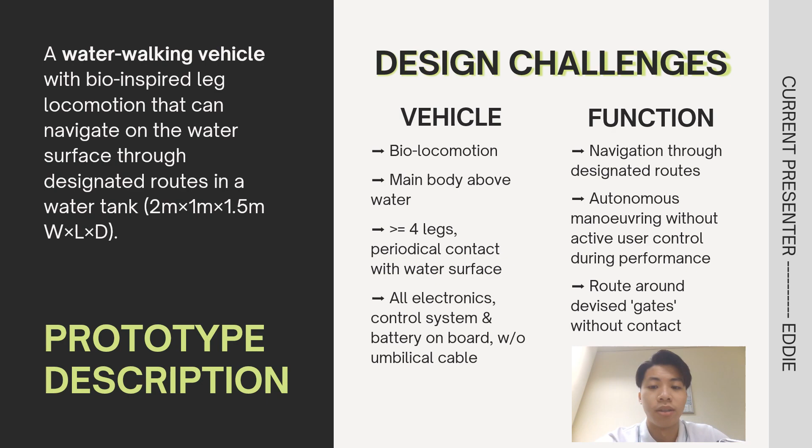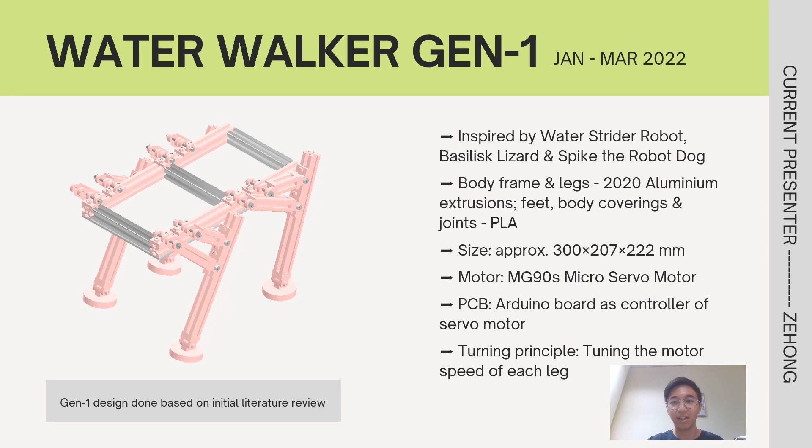MG90S microservo motor is used as the driving motor, and Arduino Uno board is the only PCB as controller of servo motor. Lastly, the turning principle was to tune the motor speed of each leg.

This slide shows the Water Walker Gen 2 that we did for September to December 2022. On the left, you can see the CAD model of our Water Walker, and on the right, it is the actual model of our Water Walker that we tested on a pool.

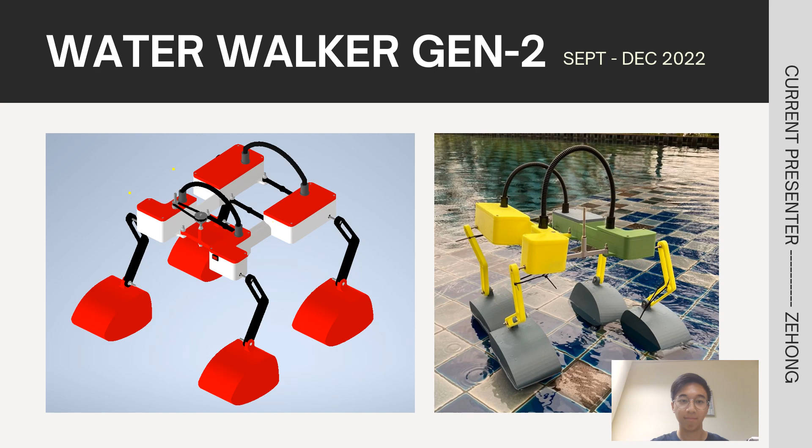Water Walker has been segregated into four main subsystems, which is body, locomotions, electrical hardware, and control systems. Eddie will be in charge of the Water Walker body, which includes body, legs, and feet, as well as other miscellaneous items like fasteners and bearings. And the locomotions was supposed to be handled by our previous groupmate, Jaydenn Lam, but due to some unforeseen circumstances, he will be dropping out and I will take over his task. Therefore, I will oversee electrical hardware along with locomotions.

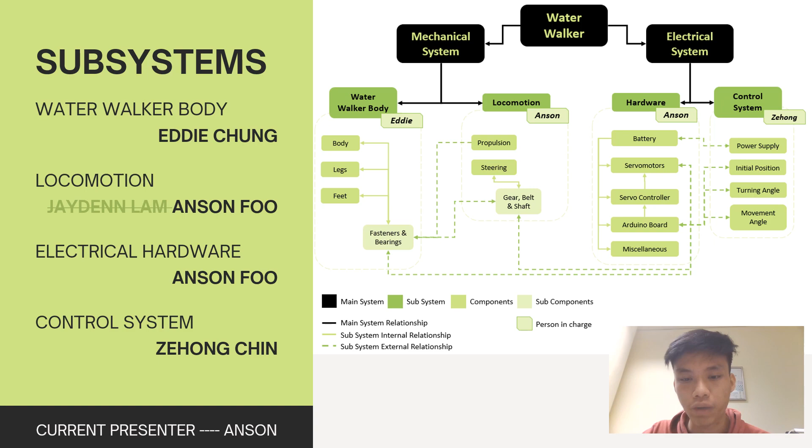Electrical hardware includes battery, servo motors, and controllers. And finally, Zehong will be assigned to control systems that perform coding of power supply, initial positions, turning, and movement angle.

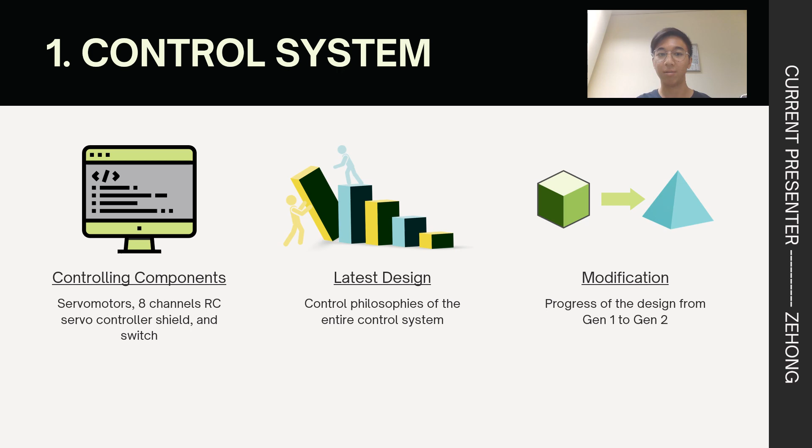In this section, we will be showing the controlling component used in the system, our latest control system design, and the modifications from the Gen 1 Water Walker. Arduino Uno R3 is the main microcontroller used for the entire subsystem. It acts as the brain of controlling the movement of the Water Walker.

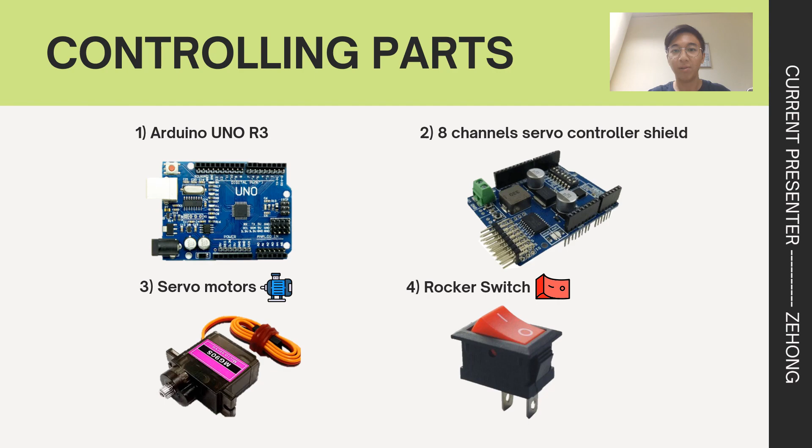Also, an 8-channel servo controller shield is newly introduced to supply more voltage to power all the servo motors. It is designed to control 8 independent servo motors concurrently in a single board with a built-in 5V 5A switching regulator. Then, servo motors model MG90S is selected to be the driving motors of the Water Walker, and lastly, a 2-pin rocker switch is used as the on-off switch of the subsystem.

In our latest control system design, the Arduino Uno board contains all the program inputs to the servo shield, servo motors, and rocker switch. Servo motors and switch will not directly connect to the Arduino board. Instead, the servo shield is attached to the Arduino Uno board to receive the input from Arduino. They are driven by 2 different power sources, which will be explained later in the electrical subsystem by Anson.

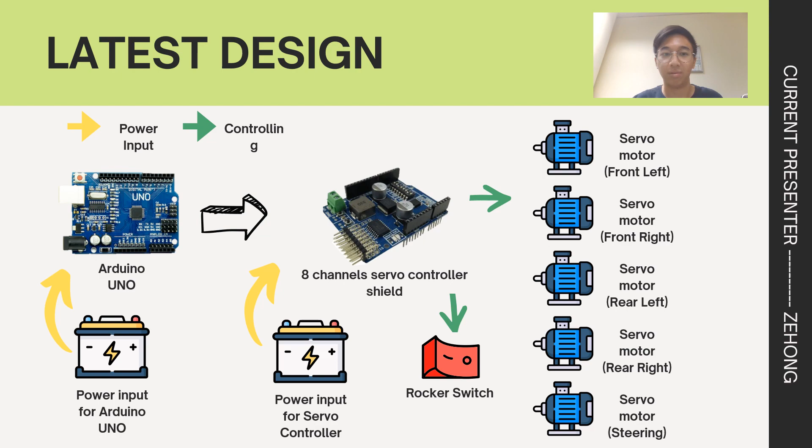Then, the servo shield controls the 5 servo motors and rocker switch. The servo motors are attached to channel 1 to 5 of the servo shield according to the order as shown. For motor movement, all motors have the same initial position at step 4000, approximately 90 degrees. Left and right half of the legs cause the motors to have different movement positions. Left motors are moved from step 3000 to 8000, while right motors are moved from step 5000 to 0. The movements are completed in 1 second.

The principle of the motors such that the water walker can move smoothly is that one pair of diagonal legs will move while the other pair will not move. For example, front left and rear right motors will move first, followed by front right and rear left motors.

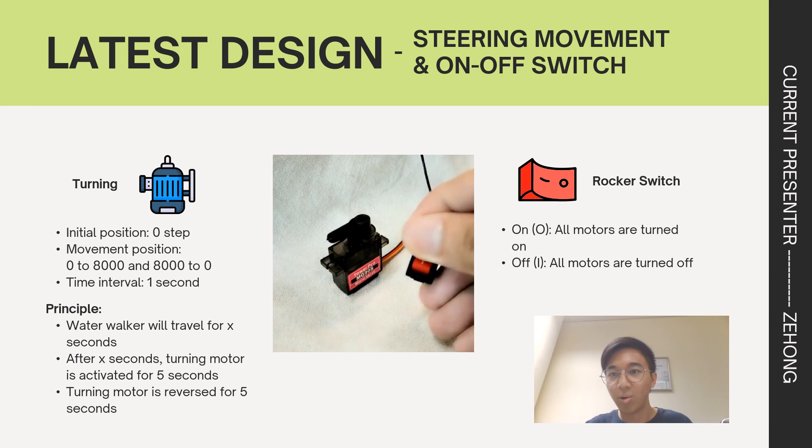For turning movement, the turning motor has an initial position of step 0. To fully utilize the motor on the timing belt, it moves from step 0 to 8000, or reversely, in 1 second. The control principle is that the water walker will travel for X seconds before reaching the gate.

After X seconds, the turning motor is activated for 5 seconds and then reversed for 5 seconds to travel back on a straight path. This principle applies to the water walker every time it needs to turn. Besides, a switch is added to turn the motors on or to shut them off.

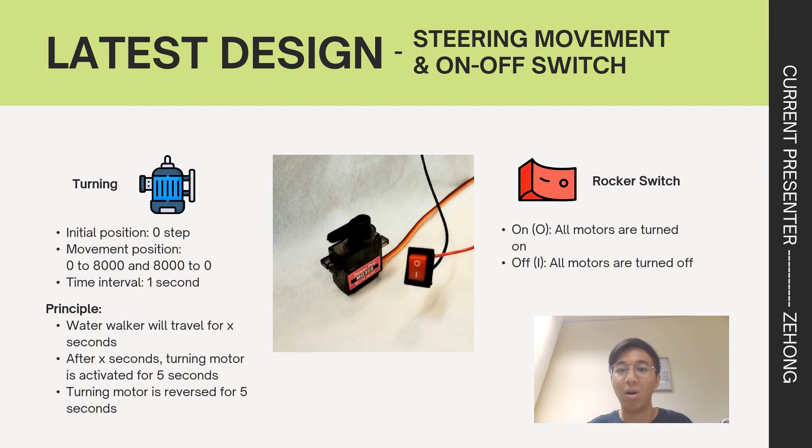To conclude the control subsystem, the Gen 2 version has 5 motors that are powered by a servo shield. The new 5th servo motor is in charge of the turning, which is different from the Gen 1 steering mechanism. An on-off switch is also added to control the flow of power to the servo motors.

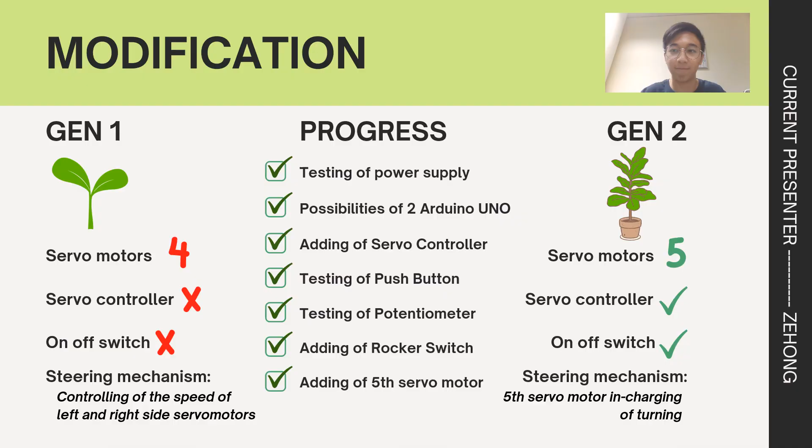In the progress of achieving the Gen 2 system, we have looked into the possibilities of using two Arduino Unos as inputs, a push button and potentiometer as switch, and tested the power supply. Therefore, all these components we need to review and modify based on their challenge phase.

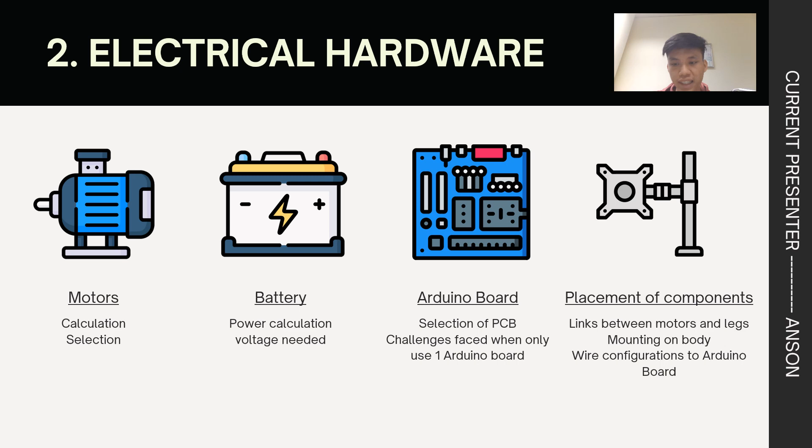This system includes a battery to power up, motors to move or steer the legs, and a programmable circuit board to act as the brain of the system. All of these components selected will be discussed later regarding the design and justifications. Finally, the components will then be assembled to another subsystem and perform a final test run.

Firstly, the motors will be focusing on the theoretical calculations and final selections based on the mass of the legs of the water walker. Buoyancy force that helps to lift up the water walker will be discussed in later parts by Eddie, while the propulsion force to move the water walker forward is determined by the mass of the legs. Starting from those parameters, the minimum slap impulse generated by the legs is calculated by multiplying the weight of the legs with the period the motor rotates.

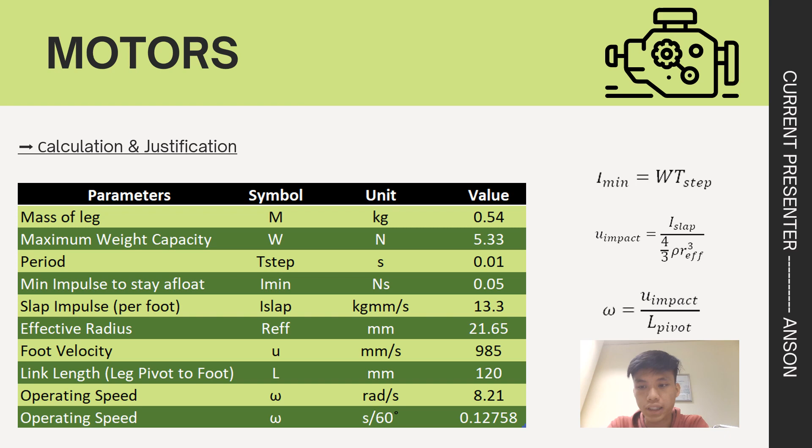Then, the foot velocity is determined using the formula as shown on the right. Finally, the desired operating speed is calculated by dividing the impact velocity by the link length provided by the body and legs subsystem.

Therefore, with the final required operating speed of 0.127 seconds per 60 degrees, I have chosen the MG90S micro servo as our thrust motor, with an operating speed of 0.08 seconds per 60 degrees. It has a stall torque of 2.2 kilogram centimeters to overcome the torque needed.

And for the battery, initially only one battery supplied 4.8 volts to all 4 walking motors. However, we met the problem of insufficient power to run the motors. This challenge will be discussed later in the next slides.

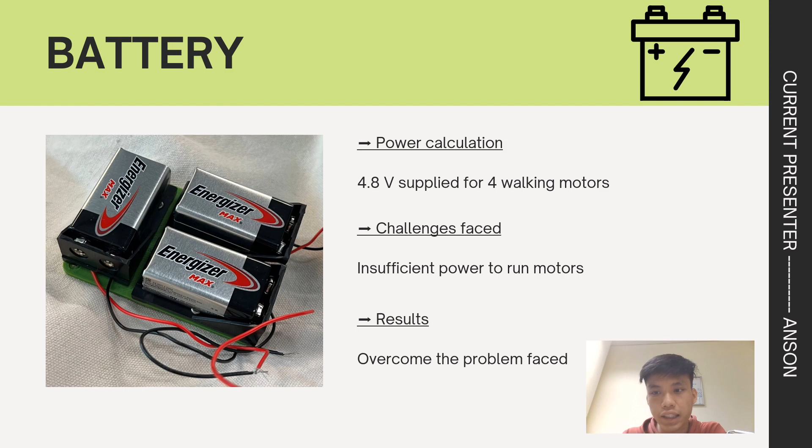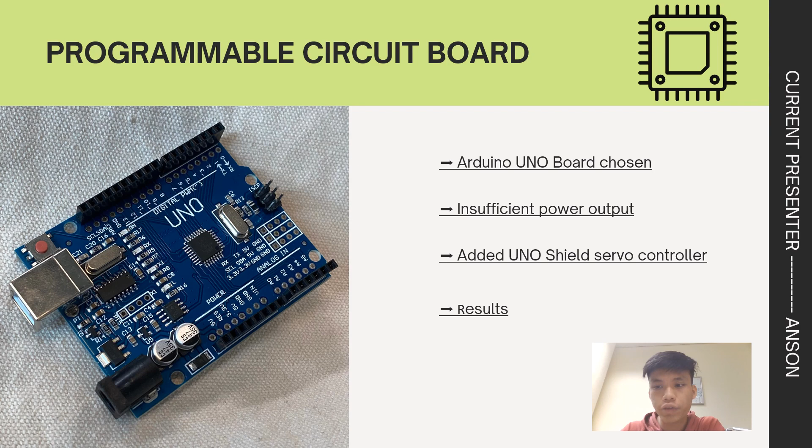And for the Programmable Circuit Board, in short PCB, we have chosen the Arduino Uno board as the brain of the servo motor. However, this PCB only supplies a maximum of 5 volts, which is only sufficient to power one single motor. Therefore, for this semester, a servo controller Uno shield has been added to resolve this issue, which will be discussed later. And now, the next video will show you the challenge faced previously.

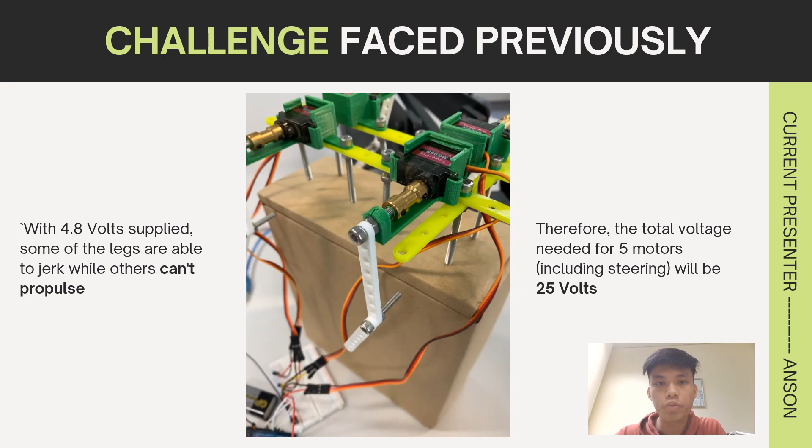With a 4.8 volt supply, the legs cannot move properly and cause some jerky motions. Therefore, if every motor needs to operate at full capacity, all 5 motors, including the steering motor, will require 25 volts to run.

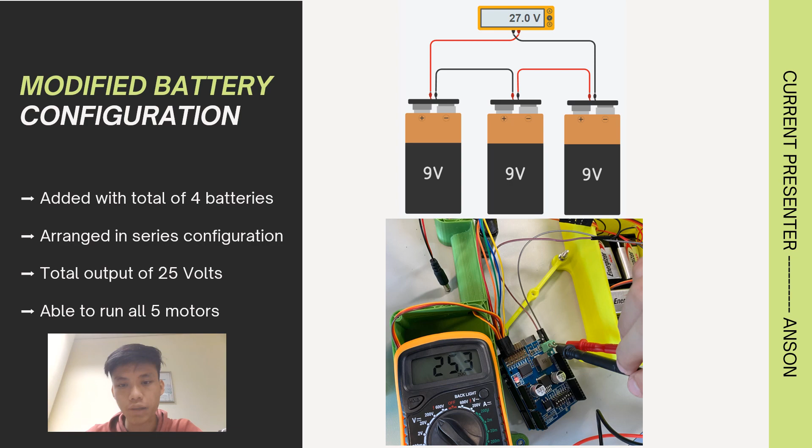With that in mind, total batteries were increased to 4, separating one battery to power the Arduino board, while the rest power a servo controller that directly supplies 25 volts to all 5 motors. By connecting three 9V batteries in series, it is able to supply up to 27 volts of power.

And for the modification of the PCB, the function of the servo controller is to provide up to 25 volts to the motors and power up to 8 motors. This controller is compatible with the Arduino board, acting as a power boost on top of it to power the rest of the motors.

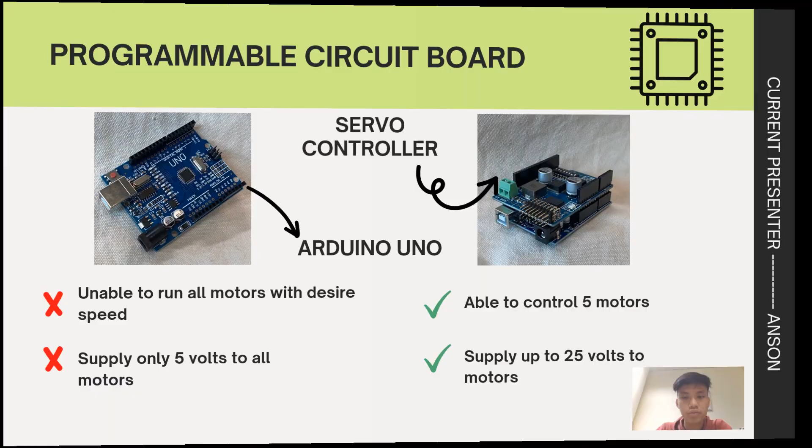The figure above shows the connection of the Arduino board and circuit. The servo controller is mounted on top of the Arduino board by slotting the channels of the servo controller onto the board. Then, the codes and power supply provided to the motors are linked at the servo controller at the side.

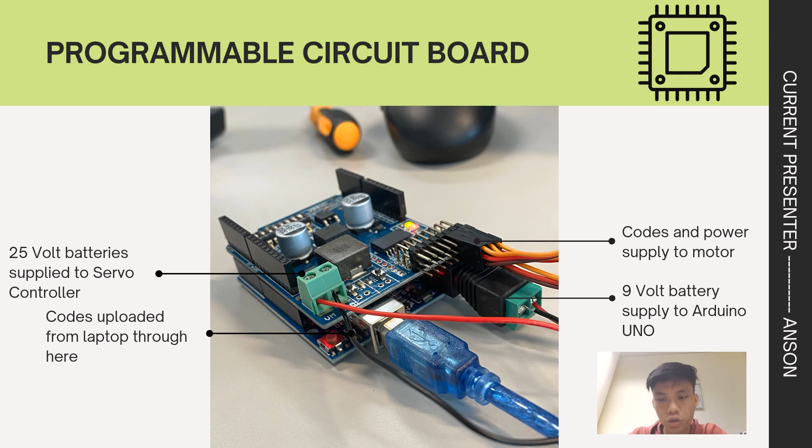A power supply of 25 volts is connected to the servo controller, while the 9-volt battery supplies the Arduino board. The blue cable that connects to the Arduino board is used for uploading the codes of the motors via laptop.

The battery pack is secured at the rear right side of the body, while the battery that powers the Arduino board is located at the front left, to balance the weight distribution so that the center of gravity will not focus on the rear side.

Now for the next video, I will be showing the test run of a single leg, to check that the motor has enough power and torque to run the legs and foot.

In this video, the power supply of 5 volts is sufficient for the motor to produce the required torque and speed. The leg and foot are able to move accordingly while connected to the motor.

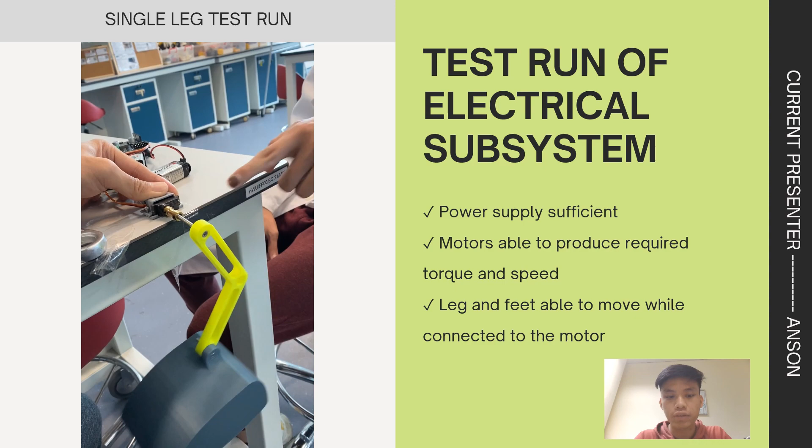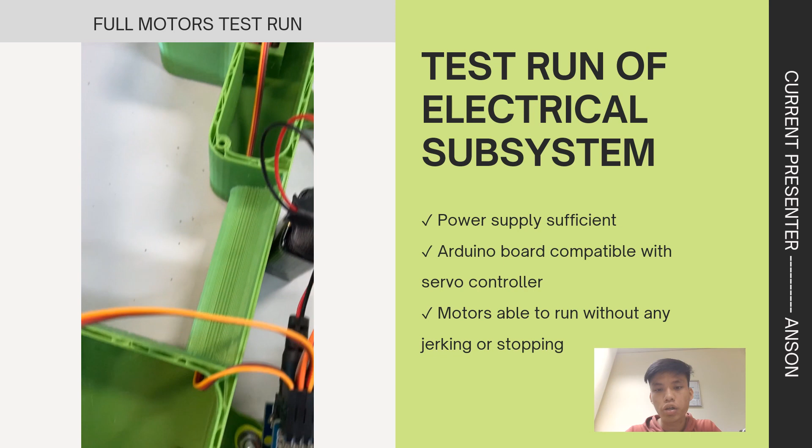Lastly, the final video here shows the full test run of the electrical subsystem. By connecting all of these components, the Arduino that was coded by Zhehong is able to run all 5 motors together with the desired speed. Modifying the power supplies and adding a servo controller solved the issues of motor jerking. To conclude, it is a success when these configurations work and all motors are able to rotate according to our requirements.

And now for the locomotion design of the water walker. These parts were left with some work that needs to be refined, and I will be in charge starting next semester. Therefore, the following slides may not show the full progress of the locomotion work. This design will mainly discuss the propulsion systems and steering mechanism.

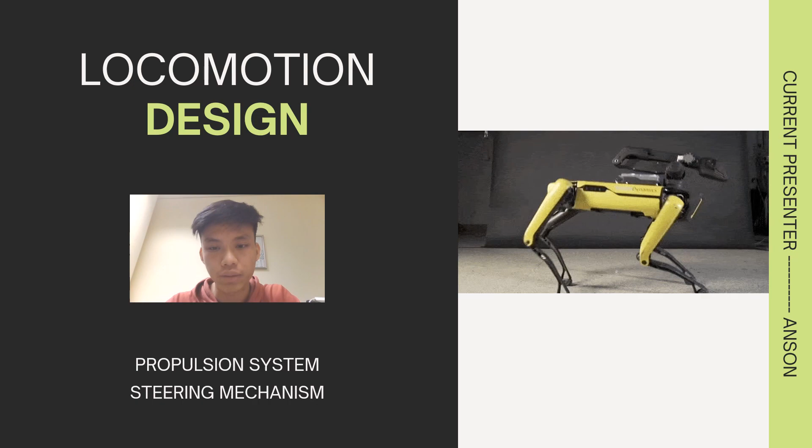The propulsion of the water walker uses a combination of skiing and the movement of a robotic dog. Since the water walker will be locomoted at the water surface, the legs will move in a trot as shown in the figure on the right, while skiing the water backwards in order to move forward. This prevents the legs from touching the water the entire time by leaving other legs free.

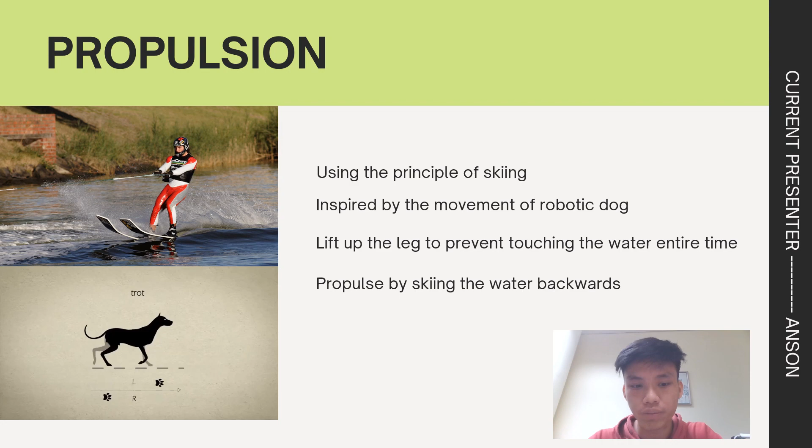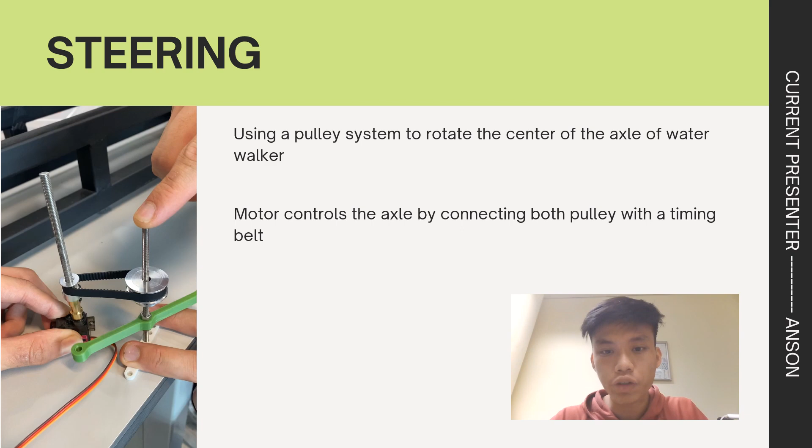For the next video, I will be showing you the steering mechanism. This steering mechanism is controlled by a timing belt pulley that is pulled by a servo motor, as shown in the video. This motor controls the axle at the middle of the water walker by connecting both pulleys with the timing belt. The next video will show you how the axle rotates and steers the water walker.

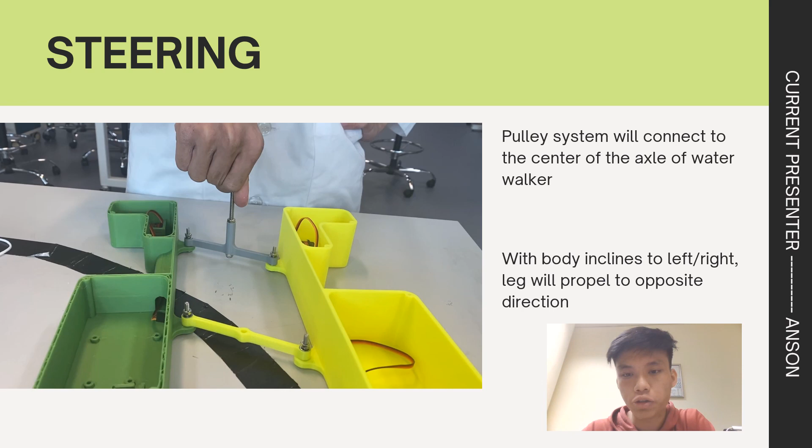By rotating the axle at the middle point, the water walker will propel in the direction required based on the legs' movement. For example, if the body inclines to the left, the legs will propel to the right side. However, this steering mechanism could not be completed this semester due to the absence of a previous groupmate. It will be further developed in our future plan.

The design of our water walker body is highly dependent on the other subsystems. Therefore, the following design sequence was employed: the fasteners and bearings were selected first based on the requirements of other subsystems, followed by the body containing all the components, 4 biolocomotive legs, and 4 buoyant feet, sized based on the weight and dimension of the water walker.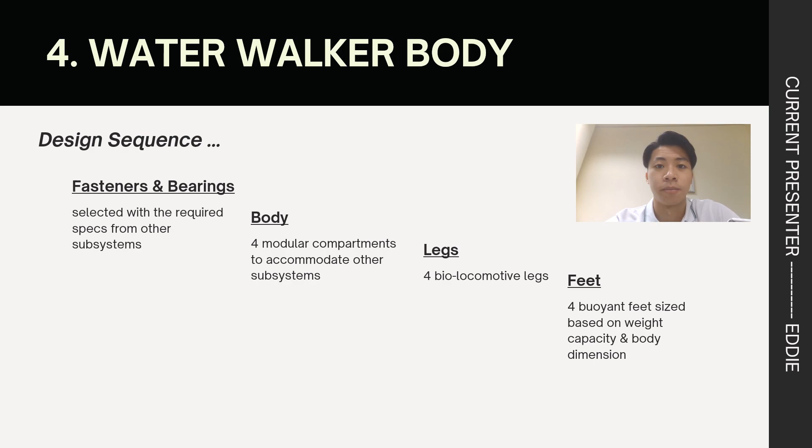In the previous semester, the progress of this subsystem was up until the development of links and joints. The leg links were decided to be made with 2020 aluminum extrusions supported by customized PLA joints. Some scaled-down modular test components were also developed in order to test the functionality of the design without wasting materials.

Finally, the fasteners, fittings, and bearing sizes were set, but a decision was later made to switch all the body components into PLA printed parts for weight reduction.

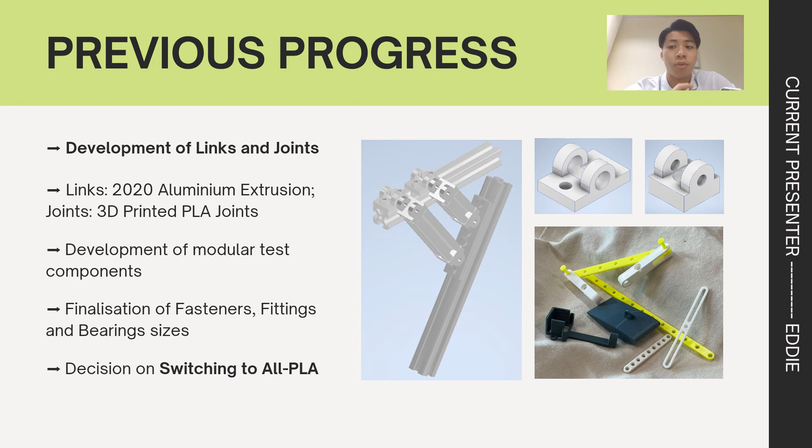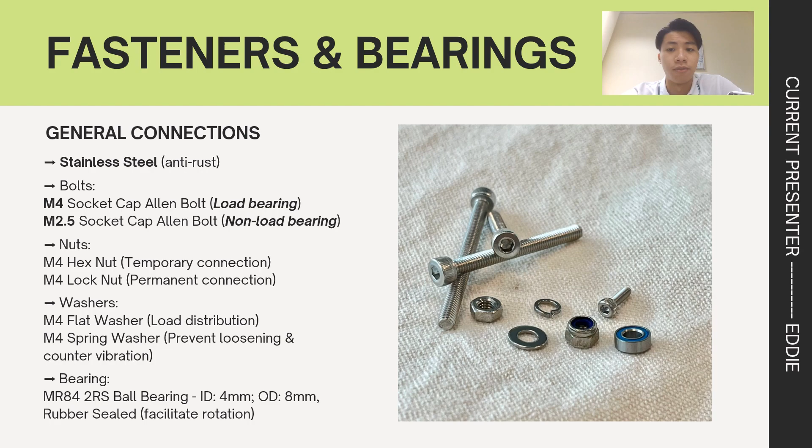The fasteners used in this project are all stainless steel unless stated otherwise, because it does not rust. The list of fasteners and bearings used can be seen on the left side of the screen. Generally, M4 was used for load-bearing parts because it has adequate strength while having considerably low mass, while M2.5 was selected for non-load-bearing parts as it is the smallest size available.

The usage of fasteners of the same size across a design had proven to be convenient. However, some standard parts in the water walker, such as the Arduino board, the servo motors, and the steering and propulsion system, would require different sizes of fasteners, which is unavoidable and had to be designed accordingly.

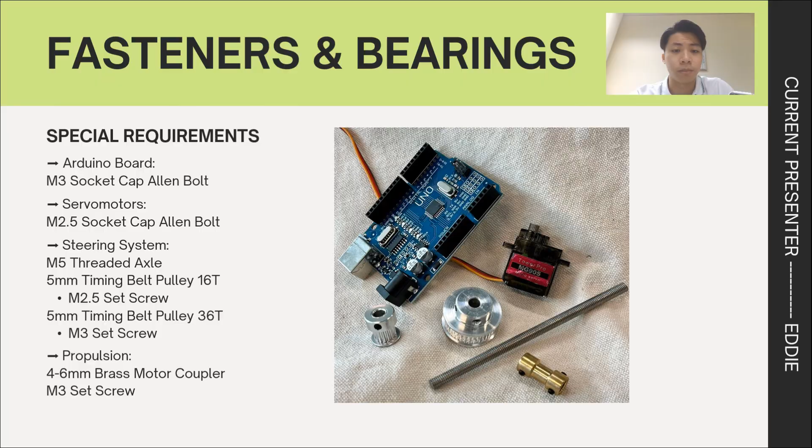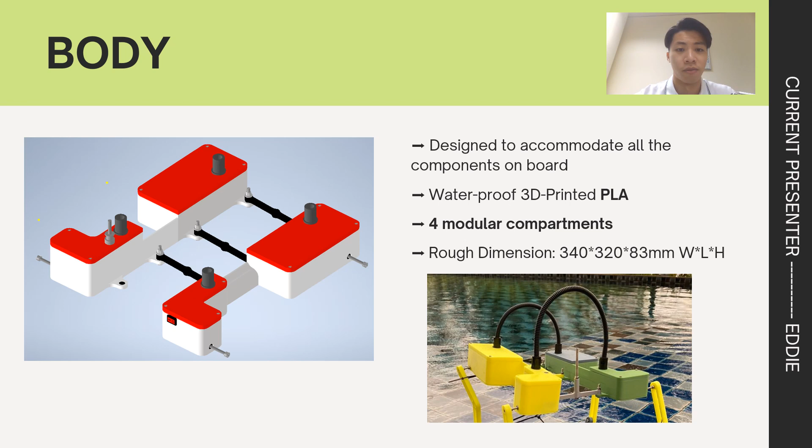With all the fasteners and bearing size determined, the body could now be designed. It has to accommodate and waterproof all of the components on board. Therefore, PLA was our choice of material. The body was split into 4 modular compartments for ease of manufacturing, weight distribution, and also to serve the propulsion and steering system.

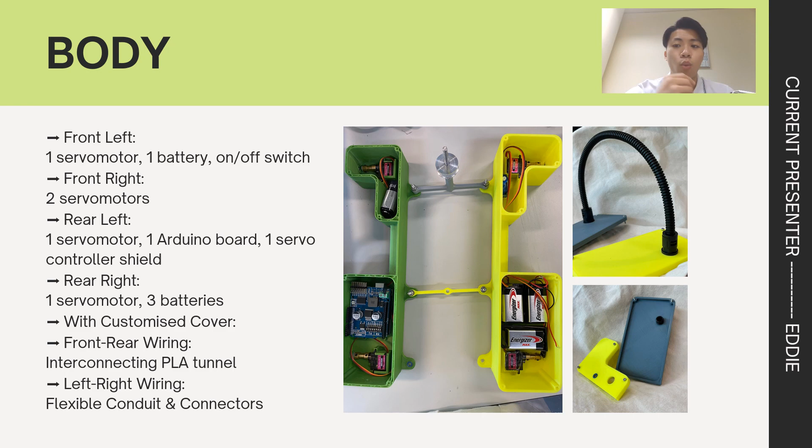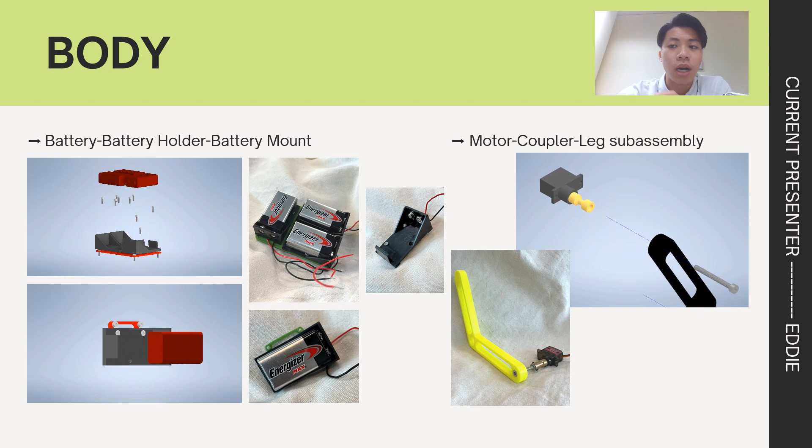The compartment covers were also custom developed with flexible conduit and tunnels to enable waterproof wiring connections between the body. The servo motors were mounted in the compartments with custom designed motor mounts. The assembly can be seen in the middle of your screen. The 4 batteries used were split into 3 and 1 with customized battery mounts supporting the battery holder before securing into the body. The motor coupler axle leg sub-assembly is assembled as demonstrated.

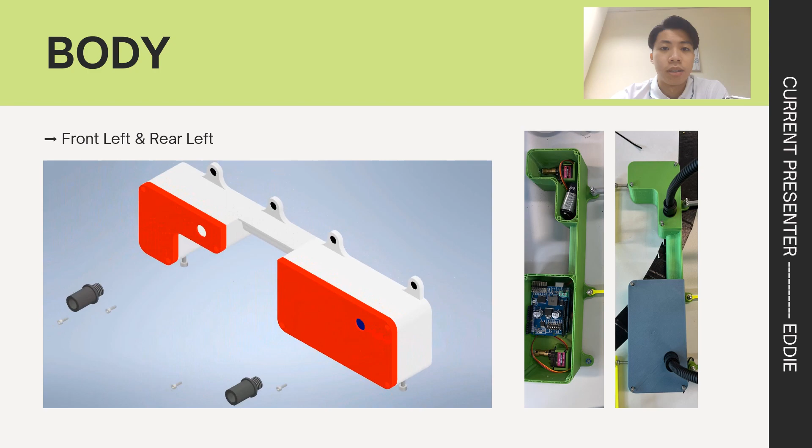With all the customized components listed, it is now time to look at the components assembly, starting with the front left and rear left, and the front right and rear right.

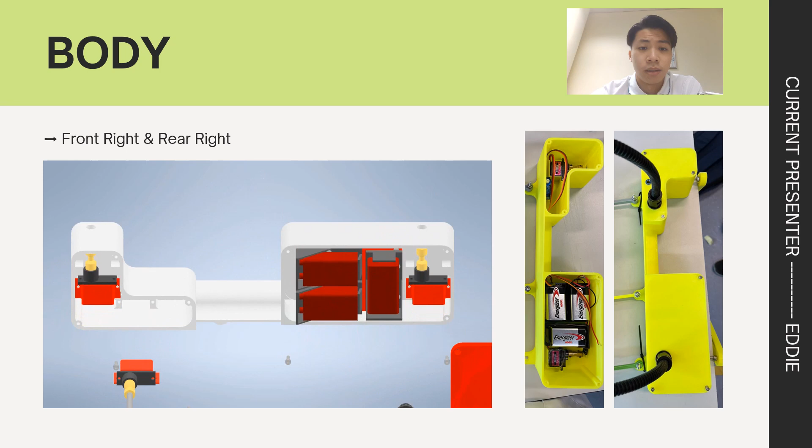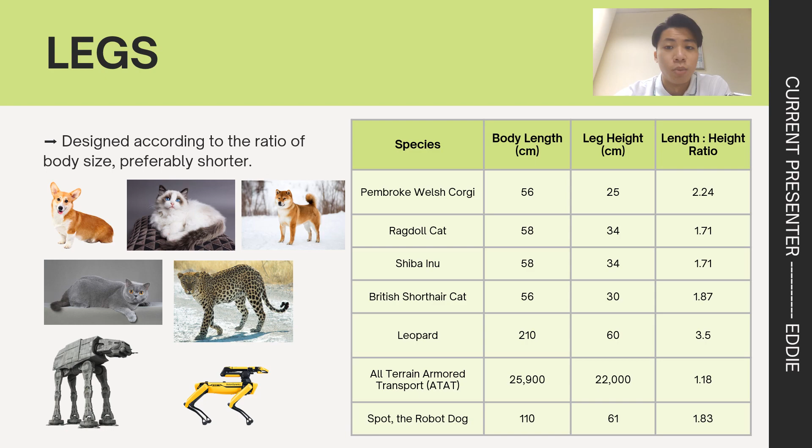The legs are arguably the most prominent feature of the water walker, as it stands out among other aquatic vehicles. Our water walker legs were designed according to the body length and height ratio from a variety of terrestrial mammals and robots, but it is preferred to be shorter for stability. Following that point, the dimensions selected for our leg are 175 mm in height and 10 mm in thickness.

It is made out of 2 120 mm links at 135 degrees to mimic the leg motion of the references in the previous slides, distribute the stress from the mounting point, and also add cookie points for aesthetics. The length-height ratio is 1.68, which resembles most of the references previously.

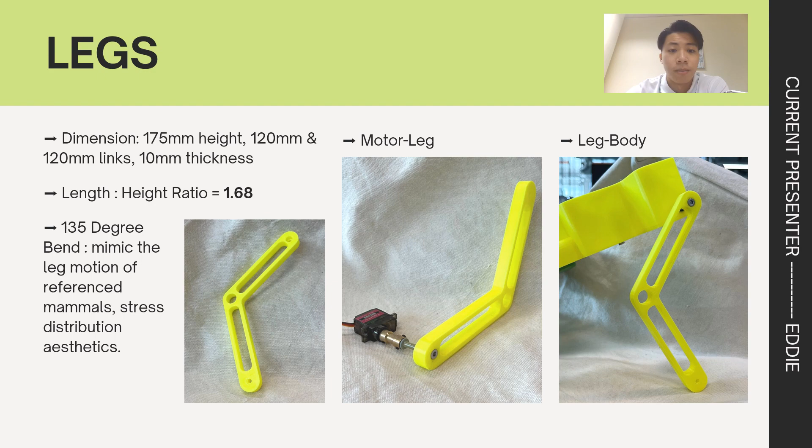With the leg design printed, an experimental compression test was done, and it could withstand at least 40 newtons of direct compressive load. FEA simulations were also performed with an approximated model of 0.8 mm wall thickness with no infill microstructure assumed. Based on the ultimate tensile strength of PLA between 30 to 35 megapascal, the water walker's leg is theoretically able to sustain 67 to 79 newtons of direct compressive load, which is more than sufficient based on the water walker's weight, which will be elaborated in the following sections.

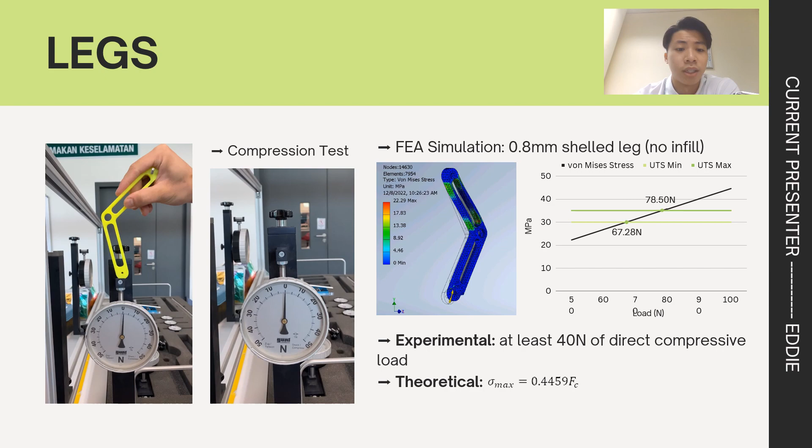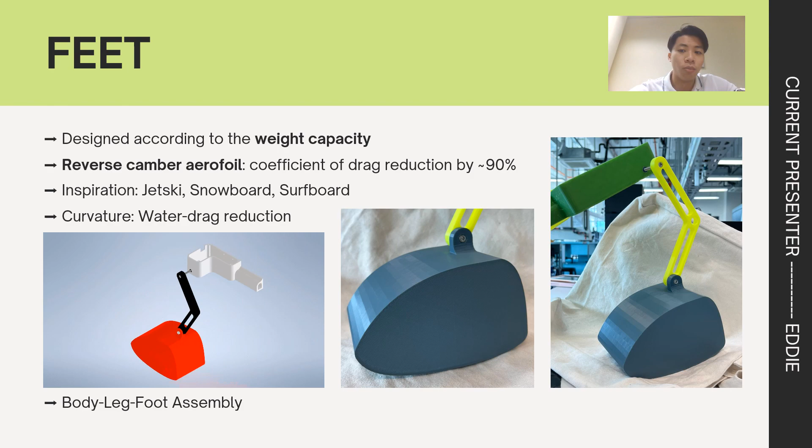Last but not least, the feet. It is a reverse camber aerofoil shape to reduce the coefficient of drag by 90% compared to a flat incident surface. Inspiration was taken from jet ski, snowboard, and surfboards with similar front to rear curvature for drag reduction.

The feet has to be designed for maximum buoyancy so that the water walker floats all the time. The design is constrained by the weight capacity and the width of the water walker. It was also assumed that point load was applied perpendicularly onto the feet, and at least 2 alternative feet are in contact with the water simultaneously during locomotion.

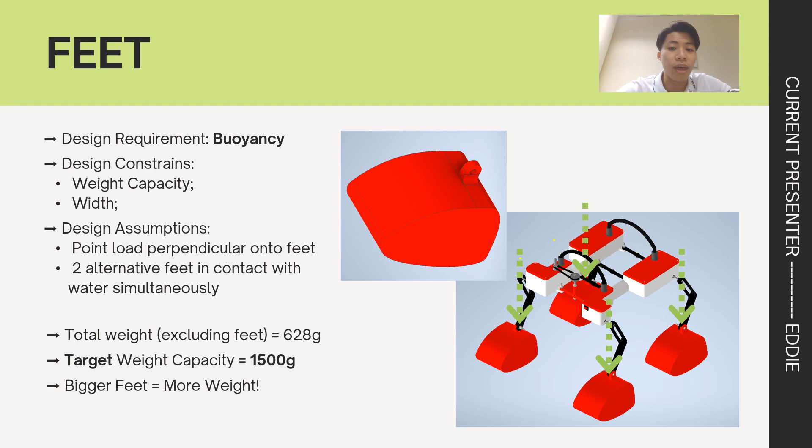Following that, the total weight of the body, legs, and components are 628 grams. The targeted weight capacity is therefore selected to be at 1,500 grams, with extra allowance being for the feet's weight and additional components if required.

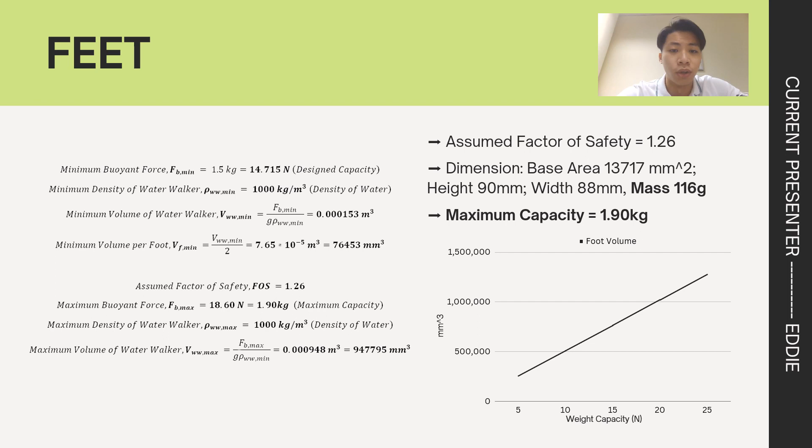Here is how the feet volume is calculated. The minimum volume of water walker can be found from the division of minimum buoyant force and water density. The minimum volume is divided by 2, as 2 is the number of feet that will be afloat at any given time. Based on the required volume for each foot and the desired factor of safety, this dimension and design of feet was concluded with a maximum body capacity of 1.90 kilograms.

There it is, the final design of the water walker, Generation 2. The total weight is 1,093 grams, which is only 57.5% of the maximum capacity.

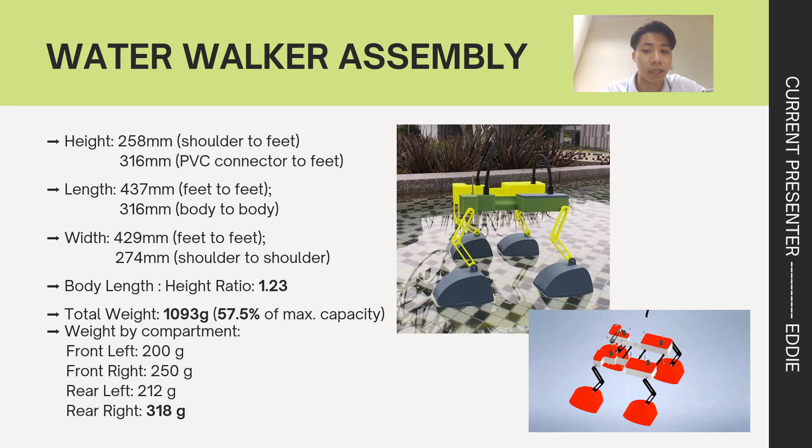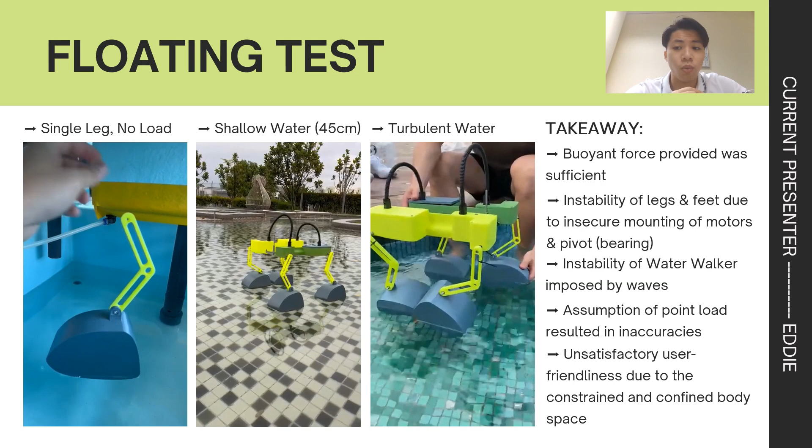Some floating tests were done after the final assembly. The first video on your left, the single unloaded leg, floats very well. It also worked in shallow waters, but in deeper water with stronger currents and waves on the right, the water walker was unable to stand afloat due to unpredictable directions of buoyant forces. The loose linkages also made the water walker unstable.

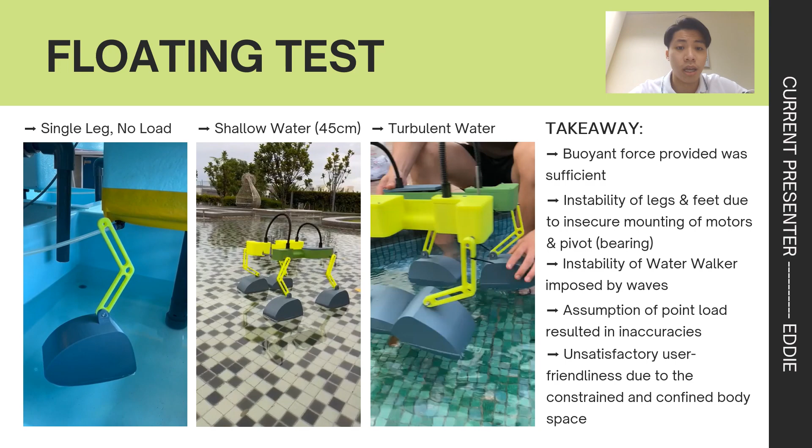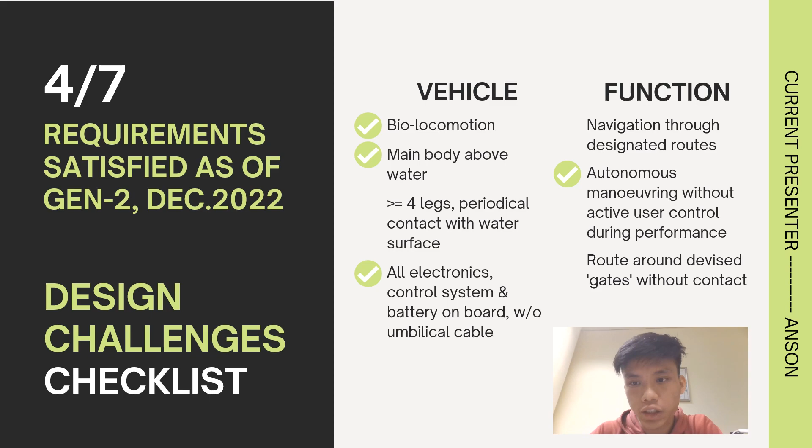In this semester, all of our subsystems have satisfied 4 checklists. However, there are 2 functions of WaterWalker that needed to be developed and designed in our future plans.